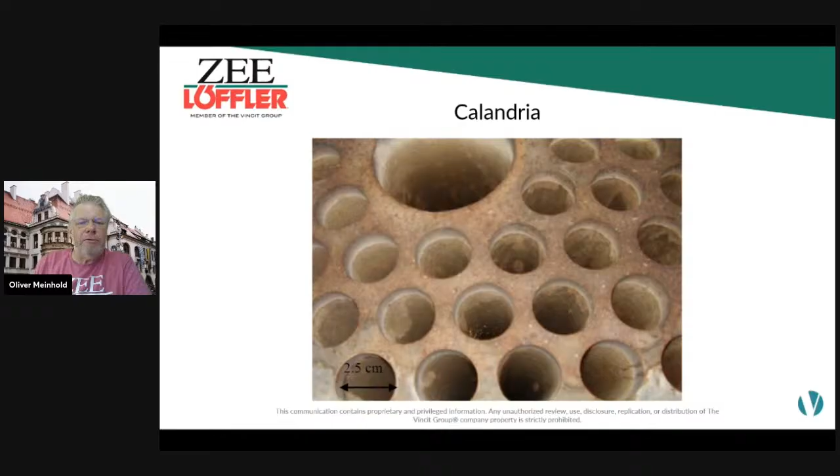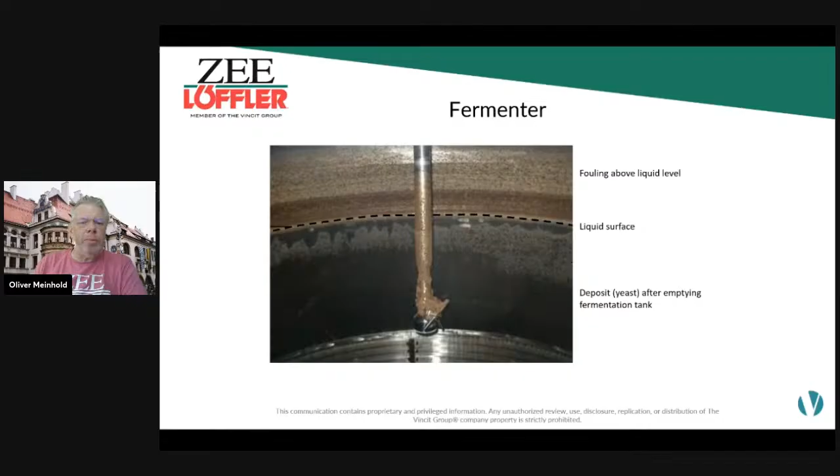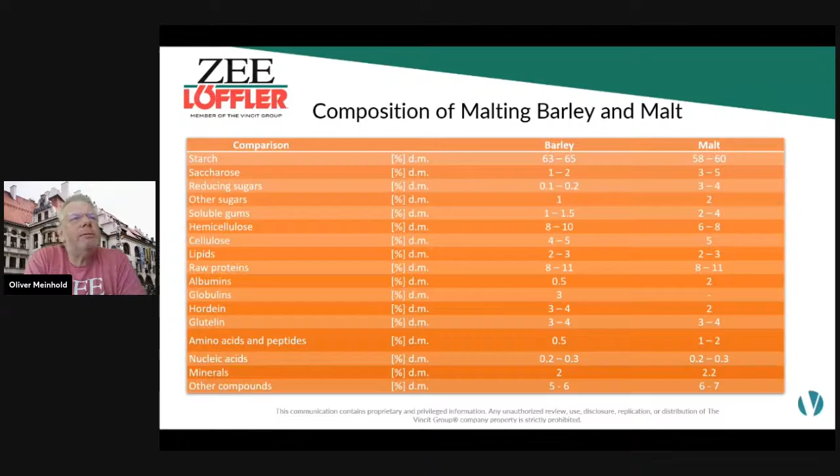When we talk about the whole process and what kind of material is going to be in your systems, what needs to be cleaned, I put up two examples. One is basically the malting barley and malt - what kind of compounds are we actually discussing? If you look at this table, you can see there's two major compounds: one is over 60%, around 60%, it's starch, so we're talking about an organic substance. Then if you look at proteins, that's around 8 to 11%. Everything else is fairly low, but that tells you that primarily during the hot side, in the kettle, in the mash tun, you will have fouling from the starch and the proteins. And if you really burn it heavily, scorching.

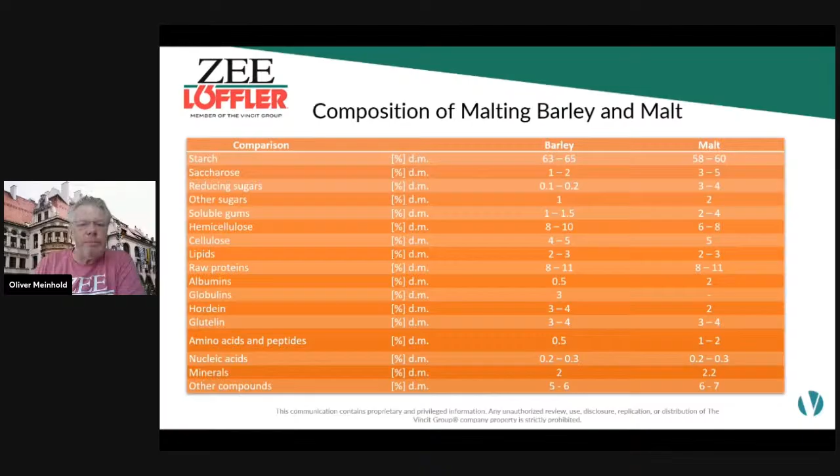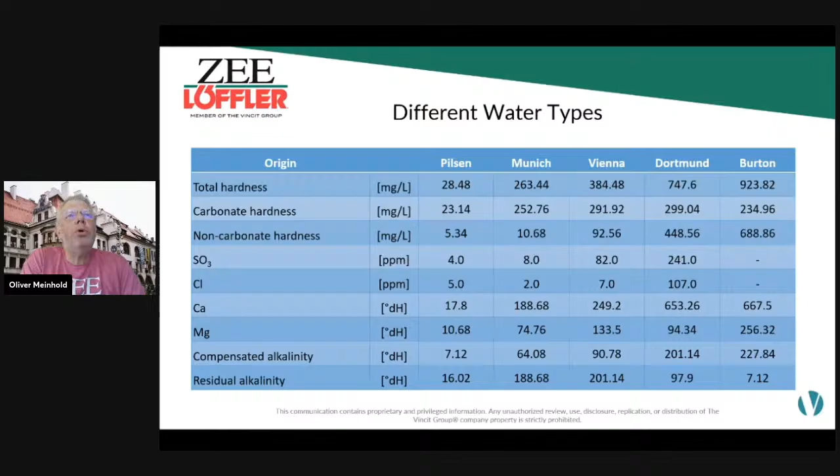Another compound is the water. These are typical waters out of the brewing industry, but in general, it's just to explain that depending on the amount of hardness of your water, you also have a higher likelihood of building up scale in your equipment. If you look at some of these waters, like far right, Burton or Dortmund, these are famous for very, very hard waters. So you have a lot of calcium and magnesium in these waters, and they tend to precipitate out and build up scale on the surface of your equipment.

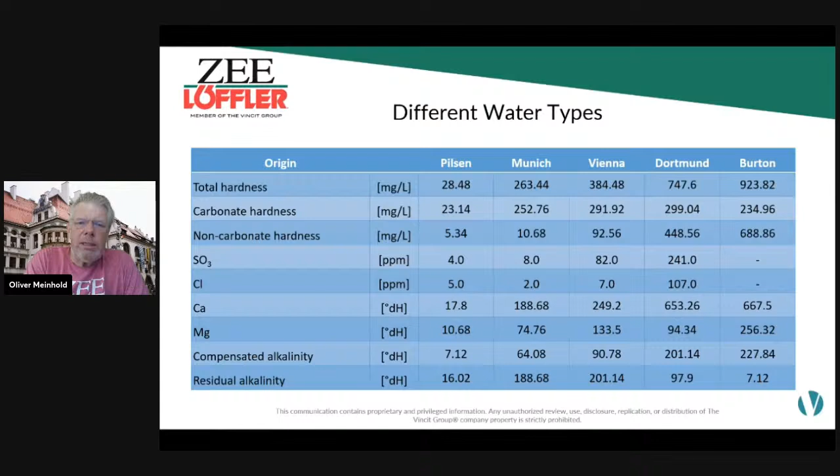So then you look at the other compounds you will put into your process later on. This is the approach - what actual material we are facing determines later on my cleaning result or my cleaning procedures.

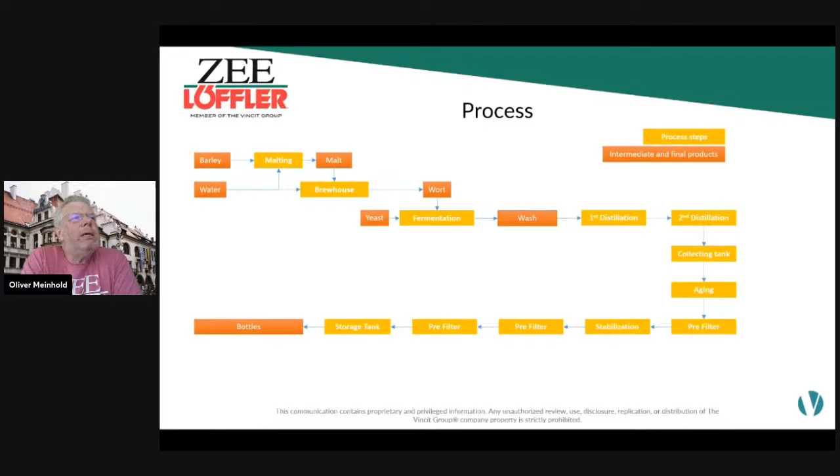Just looking at the process, we have in the far left corner, we start with malting. Then we have the brew house where we prepare the sugary solution, in quotation marks, which will then be fermented. This is kind of similar to the brewing industry in the distilling industry. Of course, in the distilling industry, we are focusing more on especially high yield on alcohol, the more the better, quotation marks. So once the fermentation is done, we have the wash, and then we basically go - this is just an example, it's not the same for everybody. Everybody has a little bit of a different setup, similar to breweries. You have one or two distillations, then it's collected, then some will be put in different types of oak barrels for aging. Then we filter them.

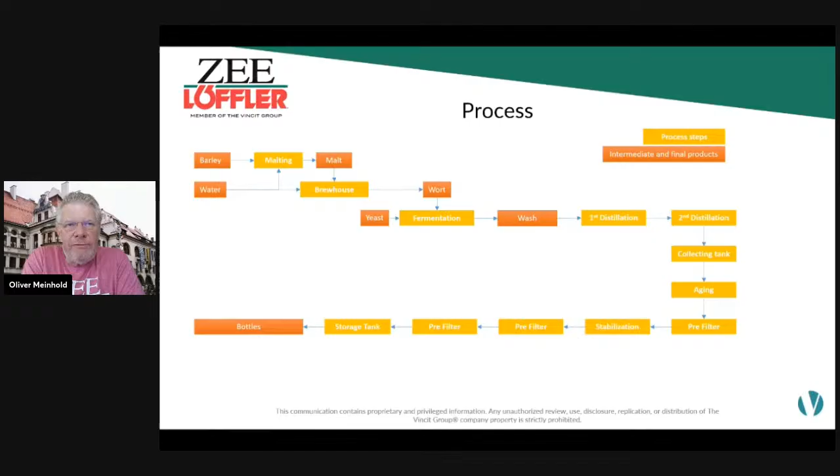Some of the stuff gets stabilized depending on what kind of material is used for this. Another few filter steps until it actually ends up in a storage tank and then finally being packaged in a bottle. So we have all kinds of different equipment in between, from starting at the malt down to the finished product in a bottle. And all these different parts or process steps need to be cleaned. Like I said before, just picture what are you putting in, what do you have in there, and what needs to be removed and how it needs to be removed.

So let's look at the terminology. CIP stands for cleaning in place. It's basically a method where we don't have to disassemble the equipment. It can be used as is with maybe some minor changes. It's often used for internal cleaning.

So you have all your pipes, your heat exchanger, your different vessels, your fermenters, and so on, your storage tanks. All these will be cleaned by an automatic system. No major modifications required. A pump will basically take the cleaning solution out of a storage tank, circulates it through these equipment, through a spray ball, through rotary jets, etc., and brings it back to the storage tank, and that is basically the cleaning.

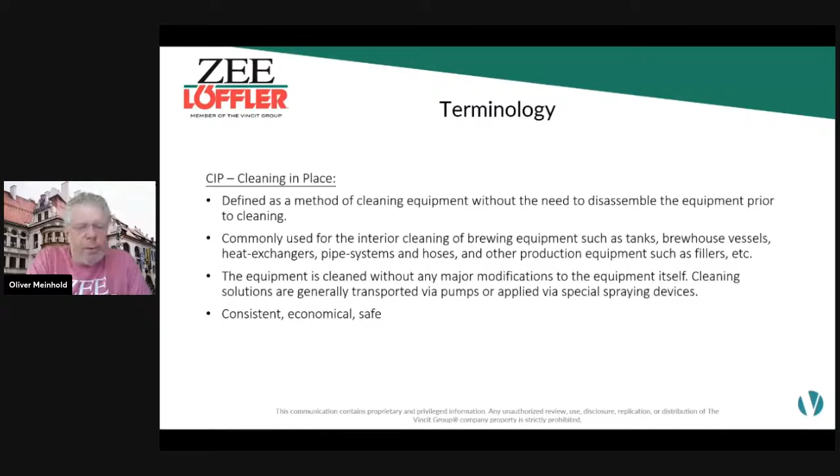The advantage of a CIP is that it is very consistent because you always have the same time, you always have the same pressure, you always have the same chemical in there, which makes it more economical. It's not like one time you use more, one time you use less water or chemistry. And due to the fact that it's completely enclosed and very automated, highly automated, it's very safe for the people working there.

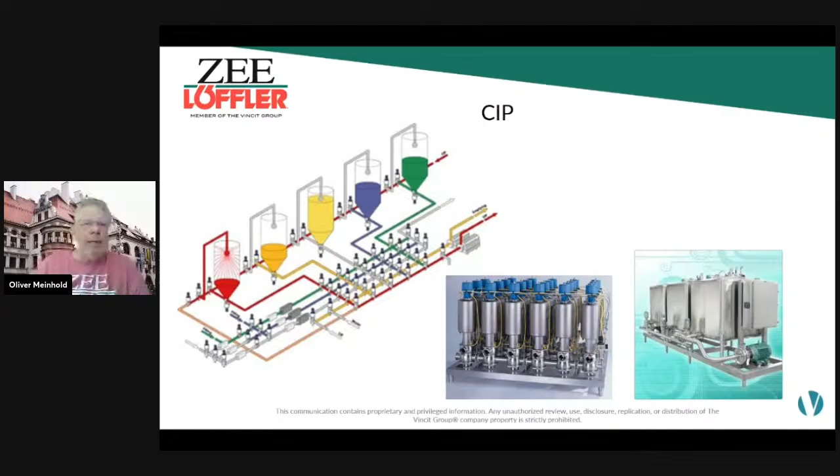And in the middle, the picture is showing you a valve block, which is basically the controlling unit for all the liquids going the right direction from the right tank to be cleaned. Some of these larger facilities, they have huge valve blocks, with hundreds of these valves because they are so highly automated and can do so many cycles at the same time.

The opposite of CIP is COP, cleaning out of place. That basically means you have to apply much more mechanical work. You have to break down the equipment. You have to take them apart. You soak them in a bucket. You take a brush, you take a sponge, whatever, to kind of wash them, to clean them.

You soak them again. Sometimes it is even recommended, if you have like a tank with a fully CIP system, that a sample valve should be taken off, taken apart, and basically soaked and manually cleaned. But this is only here and there to do it, just to ensure that it's always cleaned. It's a visual inspection, second, you will do a more intense cleaning. But overall, the more automation, the less COP, the better it is.

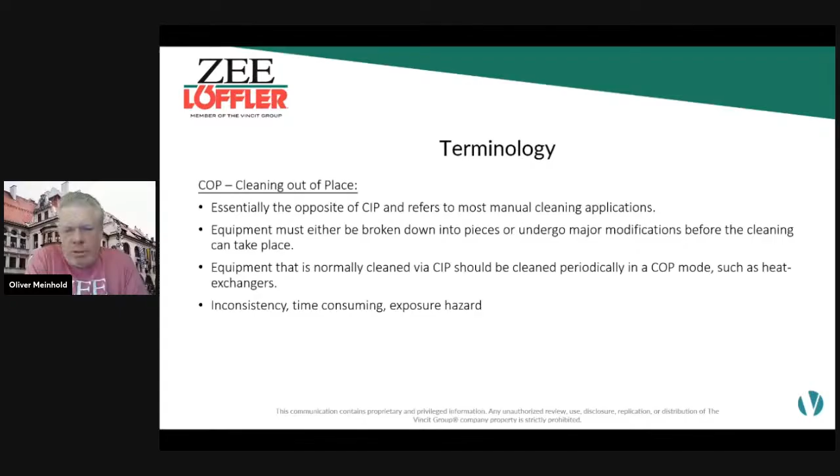Although very problematic is everybody has a different feeling of cleaning, so it's a high inconsistency. Taking things apart, soaking them, putting them back together, it's very time consuming. And of course, I always ask people to wear all the proper PPE. The exposure hazard to the chemicals is also a big issue.

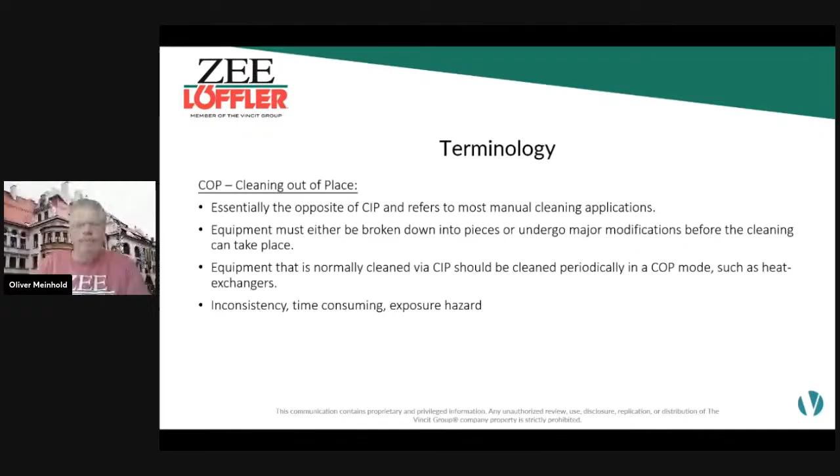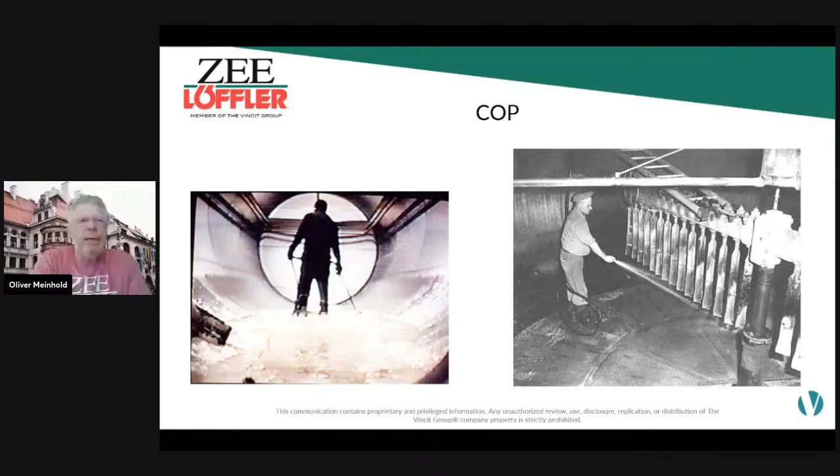So what's the theory behind the cleaning? Cleaning sounds simple. Everybody cleans at home, if it's the laundry, if it's the dishes, and so on, if you just sweep the floor. But so we have basically 4 steps.

First, what we do, we bring the cleaning solution to the point of use. So let's say in your fermenter, the picture I showed you at the beginning, you bring your caustic to that point, and first what you do is basically you wetten the whole surface and the whole soil of your krausen ring or whatever the soil is. Then with the chemicals inside of the solution, of course, they will start reacting.

And so we have various processes going on. Make sure if you have your caustic solution, try to use softened water. The harder the water gets, the more the hardness of the water competes with the soil, so the caustic is not really focusing on the soil, it also focuses on the hardness. Good built chemicals nowadays have good chelating agents in there, which takes care of this.

Then, through convective and diffusive transport, the cleaning agents get deeper into the soil to ensure everything gets properly attacked. Once that is done, you will see chemical and physical action. Physically is either from the heat of a hot caustic, or if you have a spraying device with a lot of impingement, you get more activity inside the soil. Then you start loosening it up, breaking down various bondages inside the soil to make small particles, which can then be removed.

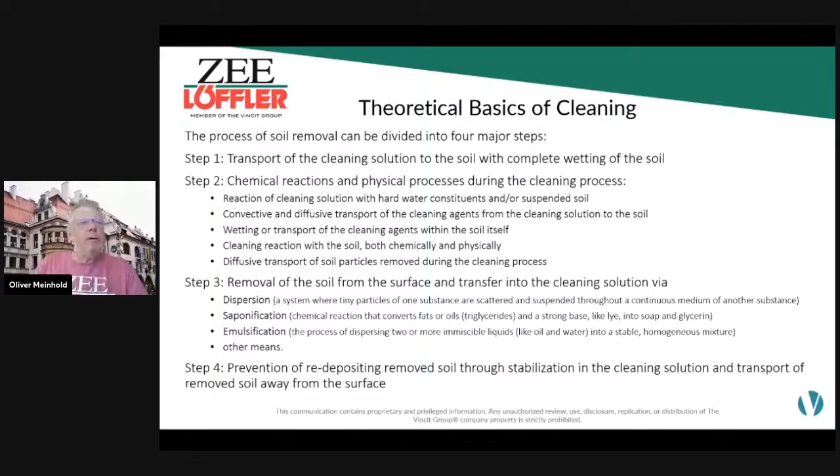But this is the theory about how to remove soil from the surface. We have basically 4 operational parameters: the chemistry, the mechanical energy from the pump with water going through a spray ball and so on, then of course temperature, and at the end, the time.

And then you add those up. The sum of all these 4 parameters creates the cleaning result, and the more automated the system is - where you keep the chemistry always at the same concentration, the same pressure on your pump, the same time, and so on - the more constant your cleaning result will be. Depending on your system, you can always make sure the cleaning result gets optimized.

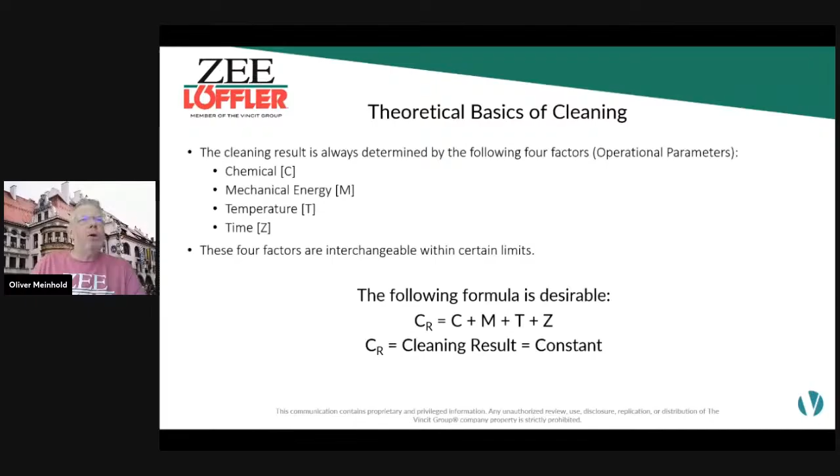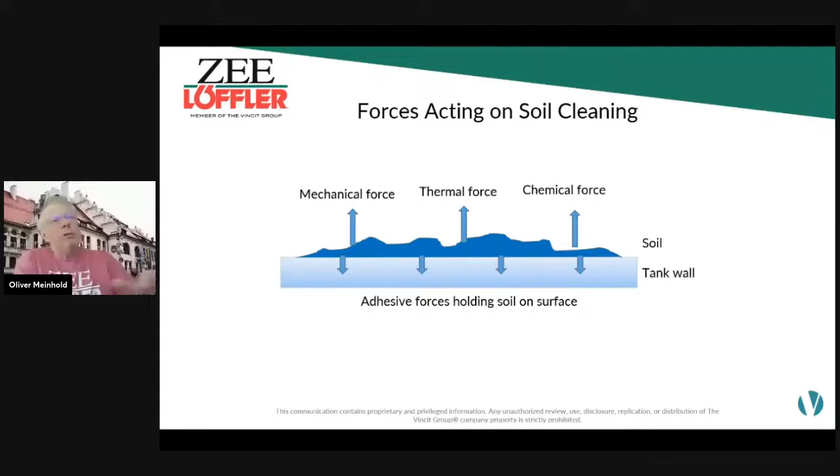Just to picture this a little bit: we have here the adhesive forces. You see the bottom, lighter colored blue, is the tank wall. Then you have the soil sitting on the tank wall, attached with various adhesive forces. It's logical that when you bring in your cleaning system, your forces have to be larger than the adhesive forces. So you bring in mechanical force, thermal force, and chemical force, and the sum of these 3 forces are stronger than the adhesive forces - that's basically how your system removes the soil from the tank wall.

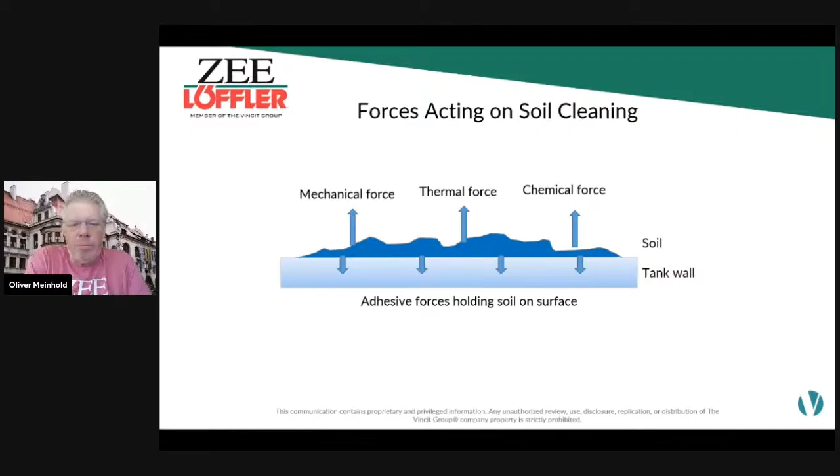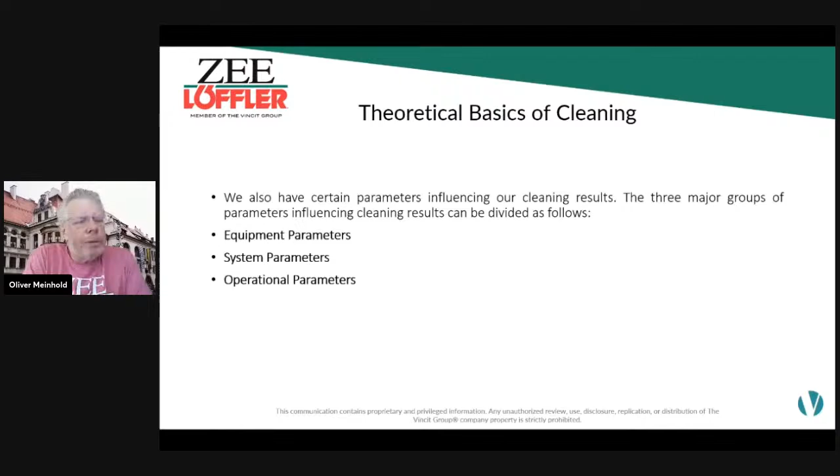We have a number of parameters which influence your cleaning: the equipment parameters, the system parameters, and the operational parameters. These 3 are the major parts which you need to observe from the beginning when you start building something.

Let's talk about equipment parameters. This is something to consider when you start building something or bringing in new equipment, or moving from an old to a larger facility, making sure all the equipment is designed for easy cleaning. Hygienic design is a keyword - you don't have rough surfaces where dirt gets attached or adhesive forces get bigger, and the materials are chemical resistant or compatible. So when planning your new production facility, make sure sanitation and cleaning are part of it from the start, to ensure you don't run into issues later.

And the more you can add as automation, the easier it is at the end, and you will save a lot of time and money.

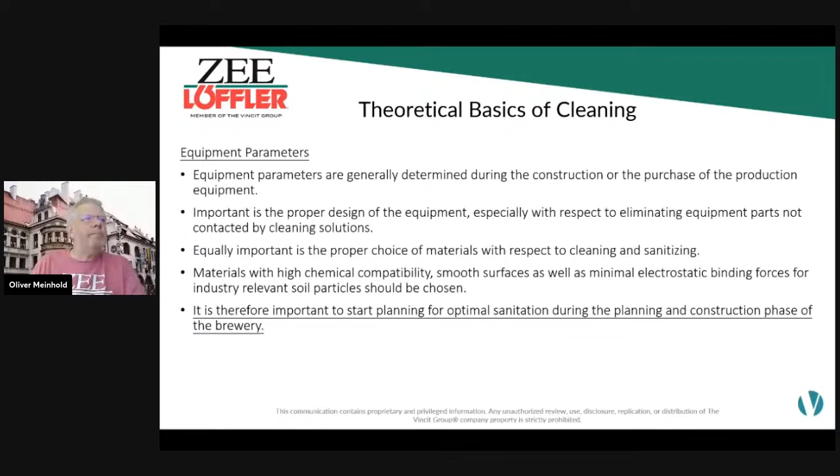System parameters are determined once everything is built up and you start actually working during regular operation.

For example, the chemical composition, the quantity you need, what's in it, how it's built. Then, of course, the frequency of sanitation, depending on what you're producing. Is it something not so heavy, loaded with organic substances? Maybe you can run 3-4 cycles before you clean. If it's something with higher load, maybe you have to clean it every time. So depending on your situation and the amount of material you put in, the frequency needs to be determined.

Then also the soil load of the cleaning solution itself. Like I said before, if you have a strainer before your CIP collection tank, you should have the capability to reduce the soil load in your caustic, and you can use it more often, which saves you a lot of water and chemistry.

I talked before that the quality of the process water itself, especially the hardness, is a big issue.

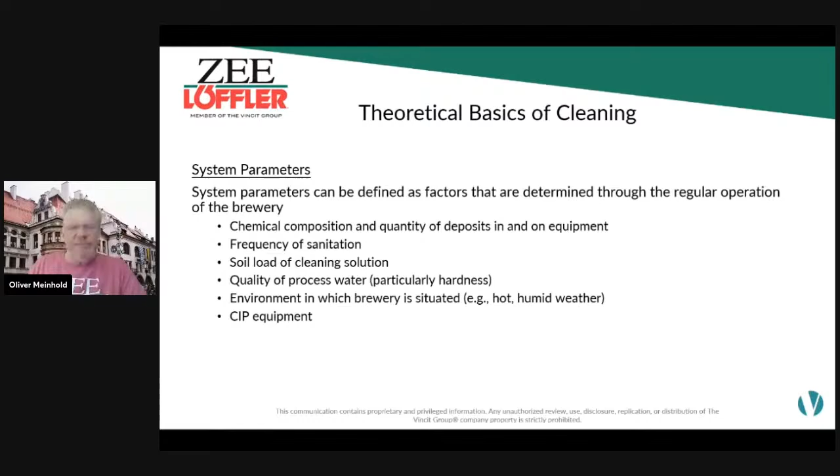Then Mr. Sinner, he was a guy working for Henkel Ecolab. He basically said, okay, we have 4 parameters in cleaning: concentration, temperature, mechanics, and time.

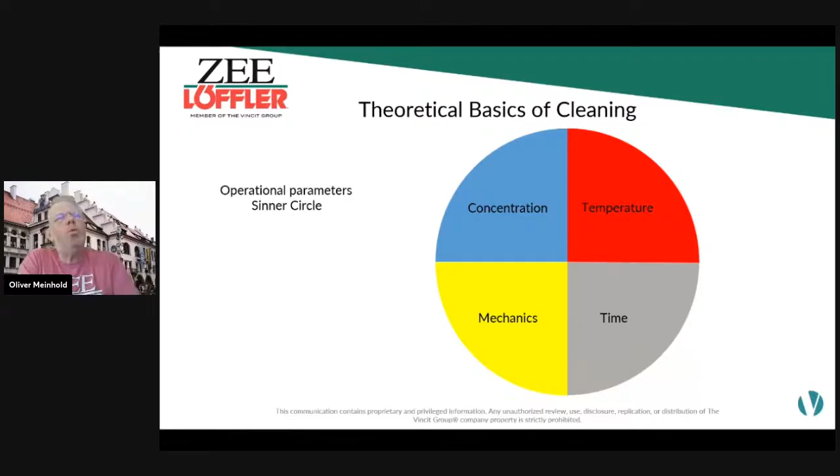When you work with those, you can manipulate them. The mechanics are pretty much set, you can't change much there. But you can say, okay, I have a time constraint, so I cannot let it run for 3 hours, so maybe I have to increase the temperature or the concentration. The pie shape gets bigger for the red temperature or the blue concentration, but I can shorten my time. Or if you say I don't have any energy to heat it up, the temperature gets smaller, so I have to let it run longer, or I have to increase the concentration of the chemical to compensate for the lack of temperature. With these parameters, you can actually optimize your cleaning to your specific needs.

Mostly if I get asked, what would you recommend? I say, so what is your most pressing parameter? Is it time? Is it that you want to be environmentally friendly, so not much energy? According to these parameters, you can adjust your program.

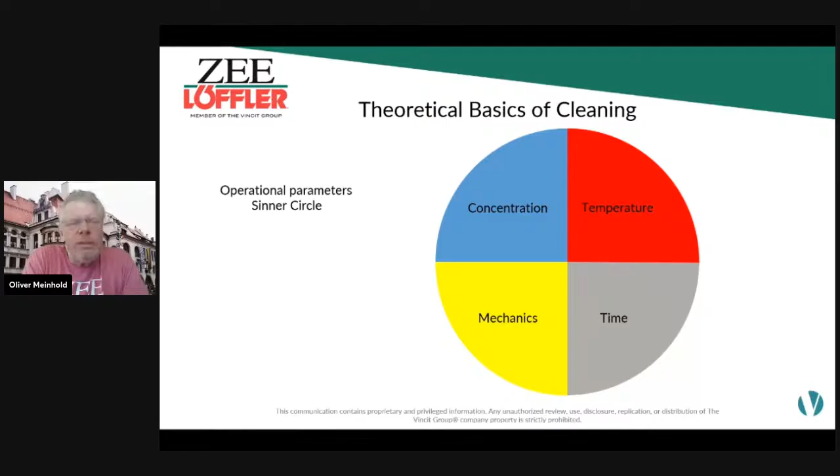Temperature. Most chemicals work at ambient temperature. The only one where we really heat it up is caustic. Caustic has very interesting behavior at 135, 140 degrees Fahrenheit, where the efficacy significantly jumps up.

There's a rule out there: if you increase the temperature by 10 C, which is about 18 Fahrenheit, your chemical reaction doubles. So theoretically, you should be able to cut your time in half. Reality is a little different, but from the pure chemical reaction, if you increase the temperature, they go faster, so you can shorten the system.

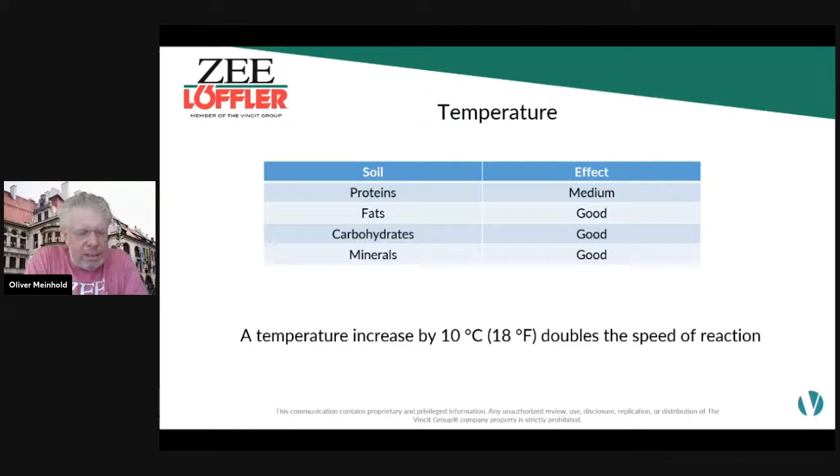So we always recommend caustic to be at the higher temperature, maximum around 175. But before you crank it up, make sure the equipment you're cleaning is also safe for these temperatures. Always look up in your manufacturer's manual what is the highest temperature, the highest concentration, what type of chemicals, to ensure you don't destroy your equipment.

Time is another parameter. It depends on the process type, on the equipment side, the process itself, and how long each step is running. Most important is the temperature of the cleaning solution: the hotter, the shorter the time. And the higher the concentration of the chemical, the shorter the time.

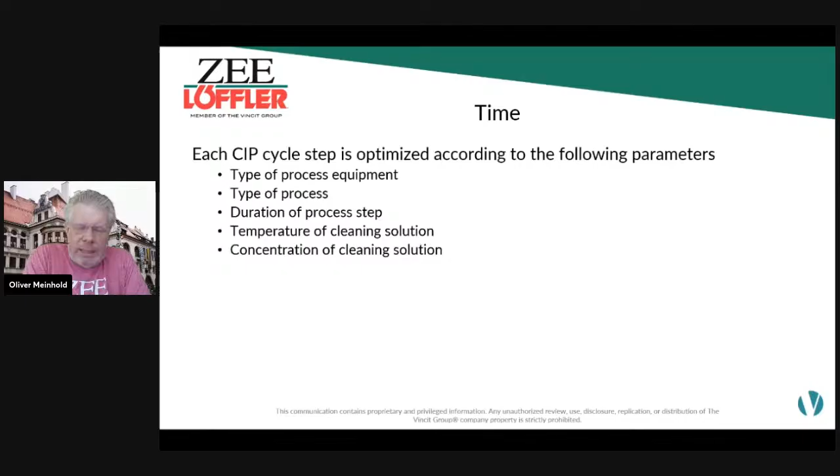So if you don't want to waste too much chemistry, just crank down the concentration and let it run longer. Most of you may have noticed that for the last 30, 40 years, your washer or dishwasher went from virtually 15, 20-minute cycles to nowadays up to 2+ hours. But they reduce the amount of water and energy because they now take time as one of the major parameters for the cleaning.

Mechanics, that's actually the most important topic, and I will talk most about this, because often if there's an issue with the cleaning, it's mostly related to a mechanical issue.

If you take a classical fermenter, you have your cylindrical part, at the bottom you have your cone, and at the top you have a dome. The idea is that when you have a spray ball inside, it brings the solution to the tank wall, and you want a closed curtain of liquid of about 2 millimeter thickness.

So you have enough liquid to get your chemicals transported to the surface, but also that your curtain of liquid running down has enough mechanical energy to remove loosened particles and bring them back to the CIP tank. So it's very important that your spraying device is in perfect condition. Otherwise, it won't work.

You open up your tank after cleaning and you see one side is completely dirty. Maybe you have some blockages in your spray ball or your rotary system is not doing its job.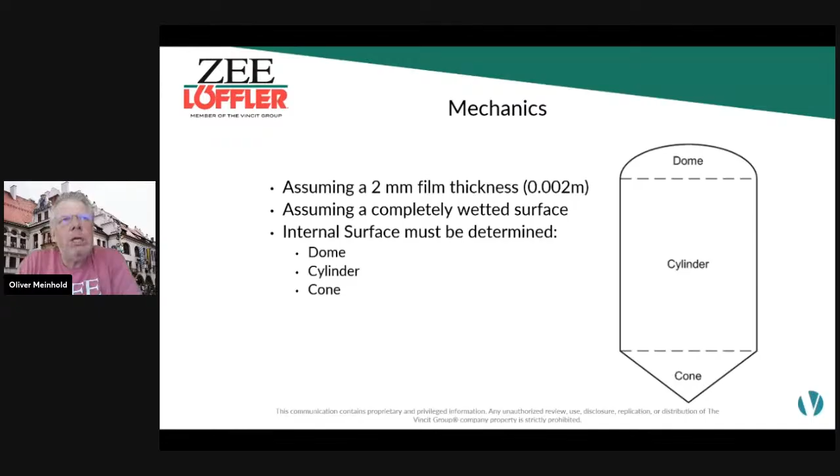So what I recommend, and this is only with cold water, no chemistry, is if you have a manhole in a smaller tank, just circulate that water and watch with a strong flashlight to see if you really have a closed curtain coming down on all sides. Sometimes some of my colleagues even used a GoPro with a stick on it, filming inside just to ensure the complete wall is covered in a nice liquid curtain.

Spray balls come in all kinds of shapes and sizes. Smaller tanks mostly have a static spray ball. The majority use something like a 360, on the far left, because it's a much easier way to get everything cleaned. Quite often when you look at these tanks as they get filled, the foam comes up, the CO2 rises more and more, so everything in the tank will be completely covered in soil.

But then you have other types, a 180 down, a 180 up, depending on your tank. If you have an open tank, maybe a 180 down is sufficient. But that's basically how you have your system set up.

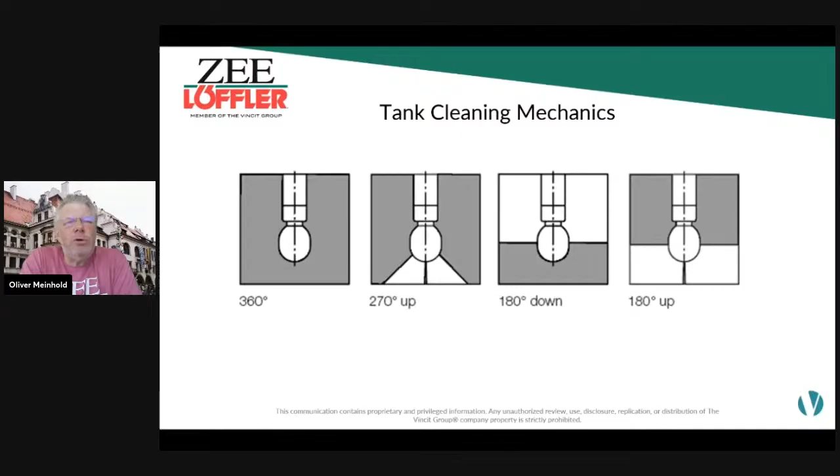Very important, especially for pipes, is the flow through your pipe. Here we talk about two terminologies: laminar flow and turbulent flow. The laminar flow is basically very straight, direct layers of speeds of the liquid, but towards the wall the speed gets slower and slower, and the first layer of liquid on the wall has actually a speed of 0. That means there is no mechanical activity, and the cleaning result is not going in the right direction.

So what you need to do is ensure you have a turbulent flow, meaning a certain minimum speed going through your pipe, because then you have internal vortexes which create enough mechanical energy to clean your wall. For doing this, Mr. Reynolds came up with a number, the Reynolds number, and determined that when you exceed a certain number, you can be sure you have a turbulent flow versus a laminar flow.

So if you look at the big arrow at the bottom, up to about 2100, we have a laminar flow. Then between 2100 to 4000, we have a transition phase, so it can be laminar or turbulent. But if you get beyond 4000, you are sure that's a turbulent flow. So how do you determine this?

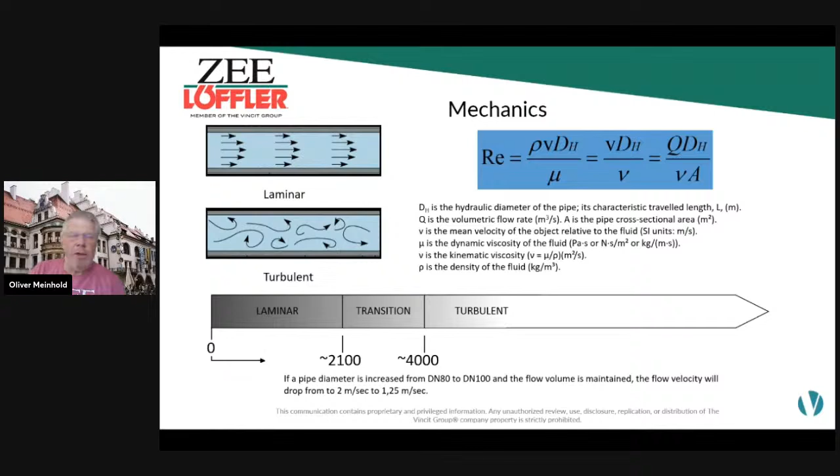If you really want to find out what's going on, you can rent flow meters which you attach to the pipe from the outside, so you don't have to build anything in. The system can tell you exactly how fast your liquid is, what the flow rate is, and so on. Just to give you an idea, if you have a pipe diameter of about 80 millimeters, the DN80, which is a little more than 3 inches, and you go up to 4 inches, about 100 millimeters, your speed drops from 2 meters per second to 1.25 meters per second. So that is already a questionable area. If you have pipe diameter changes, make sure that even in the thickest pipe, you always have the proper speed to ensure a turbulent flow.

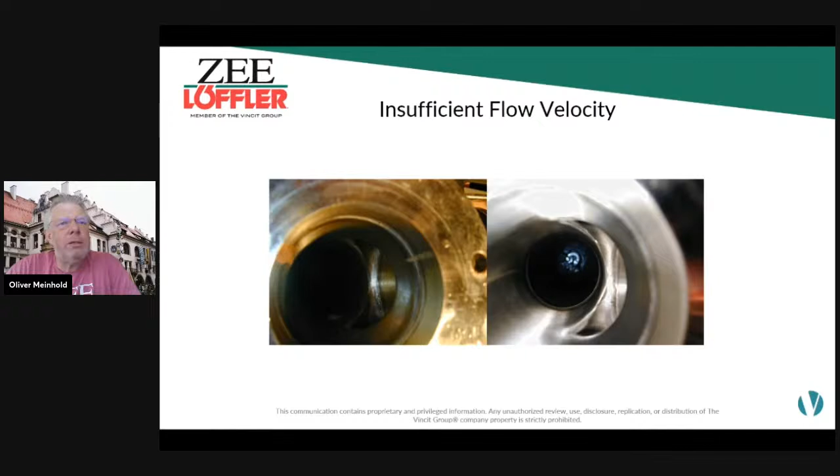Here's an example - that's exactly the same pipe, cleaned and done on purpose just for demonstration. We ran it very slowly through, so we definitely had a laminar flow. You can see now that the pipe didn't get cleaned, because at the wall there was zero mechanical activity. Then we repeated it and sped up the liquid, so we had a turbulent flow, and you can see it's spotless, nice and clean.

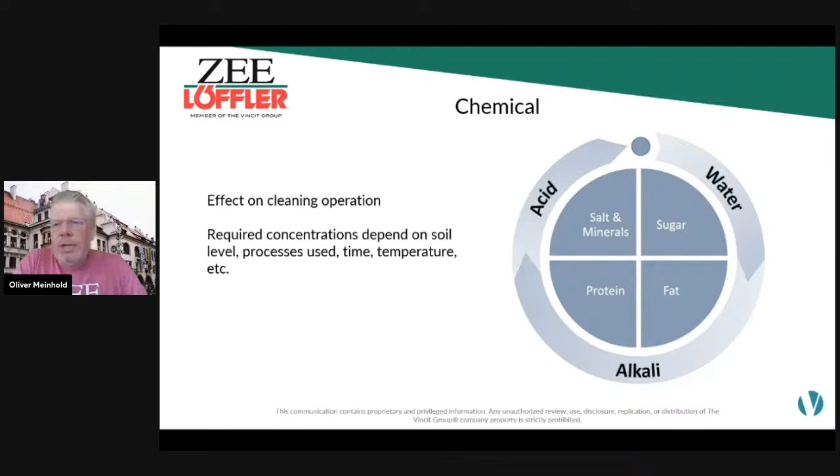The chemical itself - and we talked about this before - we deal either with organic substances or inorganic substances, and depending on what it is, you have different types of chemicals to clean. Sugar is basically water soluble, though if it gets scorched on, it's not that easy to dissolve by water anymore. But when you go over to fat and protein, which are considered organic substances, that's when your caustic comes into play. And if you continue on to inorganic substances like salt and minerals, that's where acid needs to be used. Everybody knows from home, your coffee maker or water boiler in your kitchen, when they start showing scale, you add vinegar or another organic acid, citric acid, to ensure the scale is removed.

I mentioned before, the quality of the water is very important - the chemical properties, so you want the right pH, the right hardness, but also biological. You don't want a ton of contamination or microorganisms in there, because they will be carried inside, and once you have them in the system, it's not easy to get them 100% out.

The pre-rinsing is basically to ensure that everything which is already loose, which doesn't require any chemical reaction to loosen up, is removed, so you reduce your soil load in your caustic. This should be done with a few burst rinses going straight to the drain.

Then the chemical cleaning is basically the most critical part. You have to make sure that everything works. A quick, easy test: once you open up a tank and you still see spots, what happened?

If you can wipe them off easily with a little piece of cloth, that means we were able to bring the chemicals there. They kind of broke it down, so it's loose, but we did not have enough mechanical action to remove it. If it's not moving at all, it's really hard stuck on, and you really have to scrape it off. That basically tells you we didn't even get the chemistry there. So that is mostly a mechanical issue, and we have to look into why we didn't get enough liquid there, and so on.

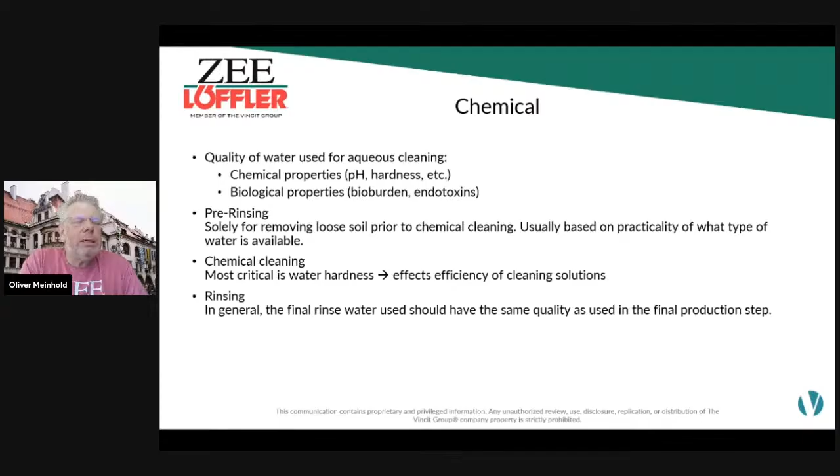Last but not least, the final rinsing is important to remove the caustic or the acid, whatever has been in there, to ensure that when you switch from caustic over to acid, you don't have too much remaining or residual caustic neutralizing the acid, removing the efficacy of the acid. So it's always recommendable to rinse between the chemicals.

A typical program, the first is a pre-rinse with ambient temperature. It's a few minutes. Sometimes we just do a few burst rinses, 3, 4, 5 times. If you have a chance to watch the drainage, when the water that's very dirty cleans up, that basically would be an indication that none of the loose dirt is there anymore.

Then we do the main work. Mostly it's organic substances, so we have caustic, about a 2% solution. That's the only one where we go higher in temperatures. The circulation time varies depending on the soil load and other factors. If you want, you can add a booster, a hydrogen peroxide-based booster, to ensure the efficacy of the caustic is increased. Built caustics have surfactants in there to reduce the viscosity and surface tension, so it gets deeper into cracks and crevices.

Once that's done, you use water to push the caustic back to your collection tank. If you have an automated system, a conductivity probe guides this - when the caustic is still high, the Siemens value is still high from the conductivity, it will divert it directly into the tank. Once that drops, you would start diluting your caustic, and you just go straight to your drain.

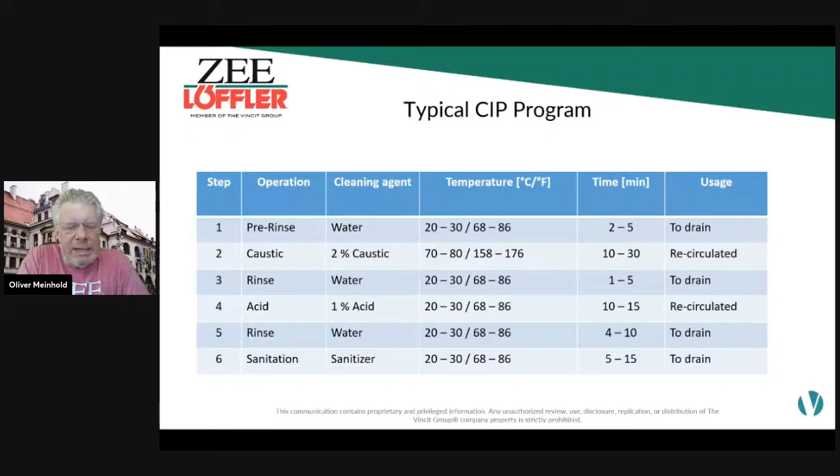Very important, before you sanitize, always make sure that your surface is absolutely clean, because you cannot sanitize a dirty surface. To have a fully successful sanitation, you have to ensure that everything else is removed. So if you have any remaining soil in there, that's a perfect place for harboring microorganisms where the sanitizer doesn't get there.

So you say, oh, I ran everything, looks good, sanitizer did its 15-minute work on everything. Even PAA works much faster, but we always recommend 10 to 15 minutes to ensure that every spot of your equipment gets actually the 30-40 seconds of PAA activity.

Also, the more you have in there, especially like peracetic acid, when it deals with other material, it starts breaking down, so it also loses efficacy very fast. So the cleaner your tank, or if the tank is perfectly clean, then it works easily.

You don't really sterilize, you just sanitize in quotation marks. So you have a log 5 reduction of your microorganisms, which is perfect in most cases. But keep in mind, if you let the tank sit for multiple days or weeks without using it, there were enough microorganisms surviving that when they start regrowing, you need to sanitize again right before the next time you use it, to ensure that all is really killed.

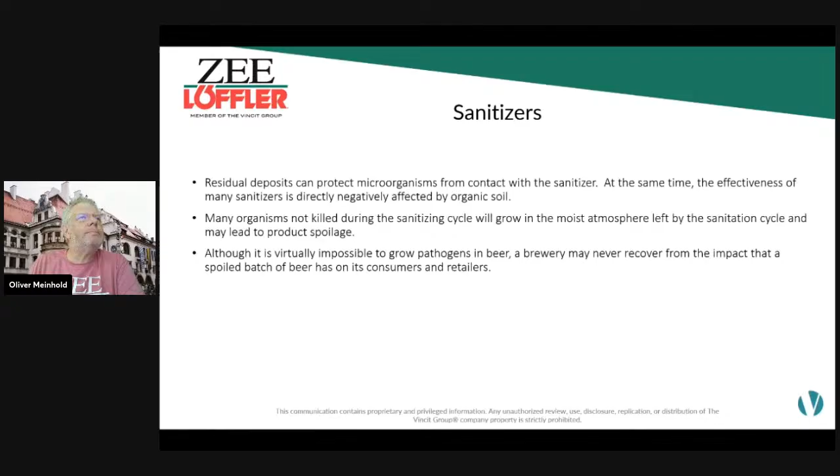Next to chemical sanitation, we can also do thermal sanitation, which is used in a few ways. It's not advisable to heat sanitize a big fermenter, because that's a lot of energy and steam which you need. Also, in such a large tank, the difference between hot and cold can be very extreme, so especially where you have cooling jackets, your metal is getting thermal stress, and that's not advisable. Besides, the amount of steam you need is pretty expensive.

Small items like a keg cleaner, where you have a very small closed environment, steam is very efficient. The beauty about steam, or heat, is if you take hot water it penetrates or heats up the whole pipe, the whole valve and everything. This way, even if you have microorganisms sitting deeper in a gasket, in a crack or crevice, where the sanitizer will not get there, the heat will get there. So heat has its advantages, but nowadays, in the majority, PA or any other chemical sanitation is the way to go.

How to optimize it: cost of clean. Some of these products are not cheap, but mostly they're very highly engineered, so you basically use much less of it. So the cost of clean is actually the number you're looking for at the end. If the product is more efficient, it's shorter, it needs less energy for heating up and so on.

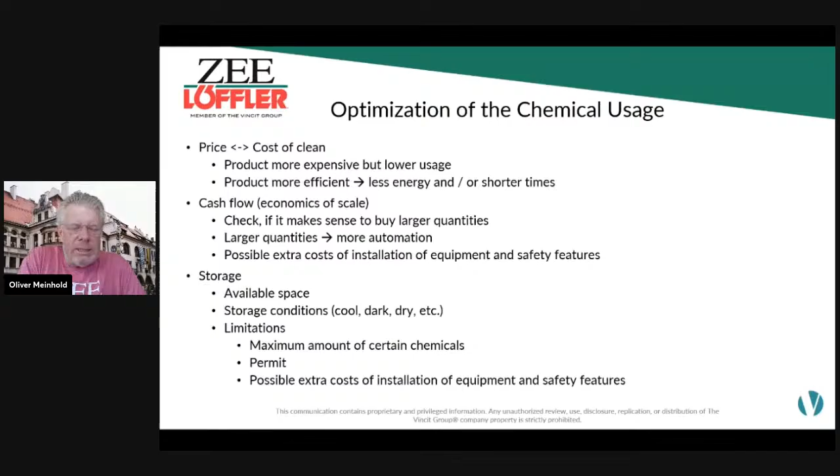So when you want to really do your comparison, make sure that the cost of clean, what does it cost me to clean a tank, how much time do I put in, how much liquid do I have to put in, what's the temperature, energy and so on. Then you have a better way of comparing, this product costs me X amount versus this one. That's a big difference.

Do we have enough caustic? Do we have enough acid in our system, and so on? Of course, it will cost more upfront, but calculate the ROI on this, and then you should be in a good picture. Storage is another problem, depending on if you have a small brewery, like in a big city where storage or space in general is not available.

How much space do you have available? Second, what are the conditions? Chemicals should always be stored in a cool, ideally dark and dry environment, well ventilated, of course, because especially PA or the oxidizer, the hydrogen peroxide based ones, when they get too warm they start breaking down. So you start basically destroying your actual cleaning solution.

Sometimes you have limitations, depending on where you're based. You cannot have more than a certain amount of certain chemicals on site. What's your permit? What can you do, especially if you look at certain chemicals, special sanitizers in regards to your wastewater? And then, of course, there's extra cost for installation of equipment.

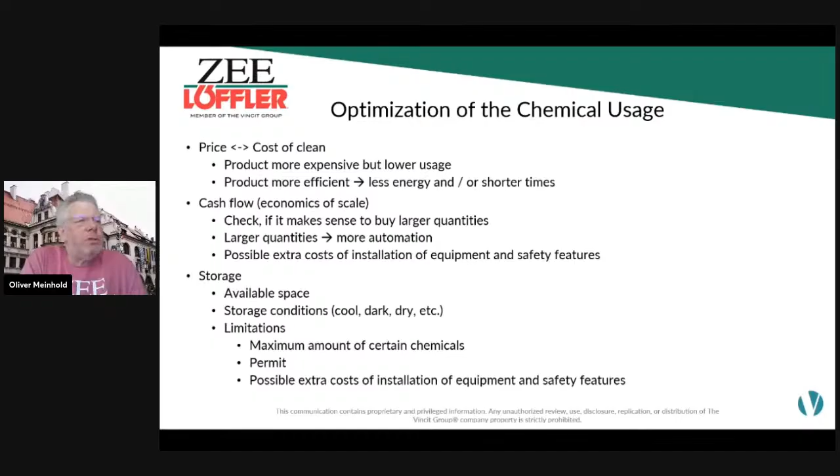Transportation is also nowadays a very big topic. Trucking went through the roof. Larger quantities mean lower transportation costs. Often the truck needs to roll up. Maybe you can share deliveries with your neighboring brewery and so on. If you have a mini bulk, basically a tank which gets filled but it's not a full tanker load, a smaller one, maybe you can have a milk run, things like that.

But with chemicals, the higher the concentration, the lower the cost per unit. Blended engineered chemicals have a lower usage rate. But the important thing is stability: how stable is it, especially with PA, hydrogen peroxide, or chlorinated products, which don't have a very long shelf life. The shelf life also depends on your storage conditions. The warmer it is, the more sunlight gets in there, the more likely the shelf life gets reduced.

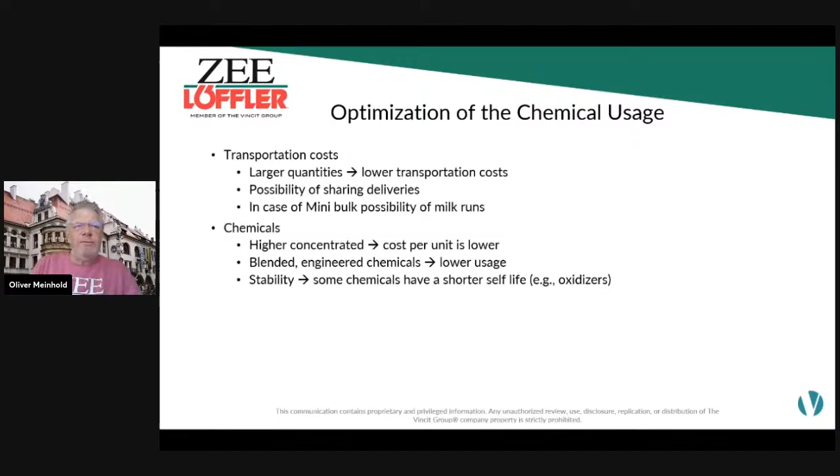I talked about this, here's just a little summary. When you look at the process parameter time, the longer it is, the less chemicals you need, or the lower the temperatures are. If you have a higher temperature, you can speed up the process, shorten your cycles, and use less chemicals.

Mechanics - make sure you always have an eye on your pipes, the velocity. Then, of course, the spraying device, if you have a rotary jet where you really utilize the impingement, you add quite a bit of cleaning force through the mechanicals. And then you can add a booster like hydrogen peroxide to optimize your caustic usage.

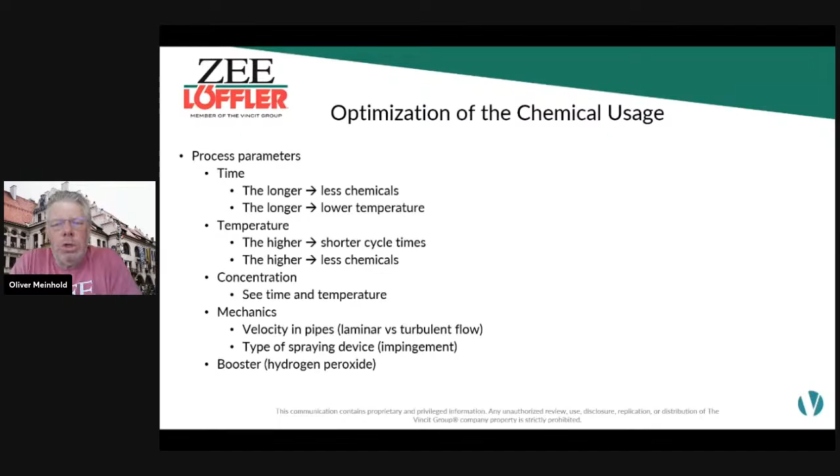Again, the Sinner cycle, this colored cycle I showed you before - I mentioned this already. So what's your personal preference? Make sure that you look at your own system, your own schedules, and everything.

What's ideal - where's your bottleneck in your process? What's available? Do you have high energy cost or low energy cost? How's the water available? What's the price of the water? What's the quality of the water? And so on.

What's your wastewater? Do you have to treat it yourself? Can you put it down the drain without any treatment, no pH adjustment, and so on? This is something you need to determine. We are more than happy to help you on this, but it's something you have to figure out to see where your personal preference of cleaning lies.

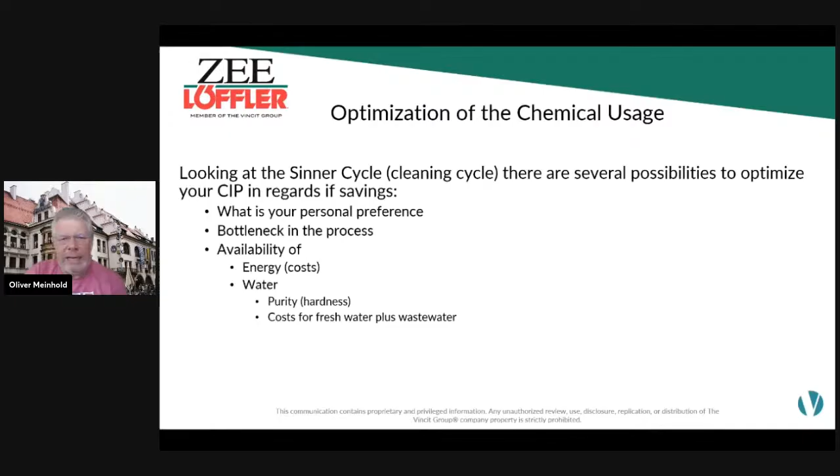CIP automation - that's another thing I'd like to put a little emphasis on. Nowadays you get these fully automated systems, nice screens with all these beautiful colored curves, control units, and so on. The problem is, are you sure it's really doing what it says it is?

Is your temperature gauge inside reading correctly? Is your conductivity probe reading the right concentration? If you start leaning back and relying on this, that is not the best idea. You still have to make sure every time that all the systems are reading correctly.

So there are certain PMs for a temperature probe, a conductivity probe, and so on, where you basically just control - is this correct? You take an external thermometer, hold it up to the pipe or the liquid, to see if it's really the 140s which the system tells you. You take a sample of the probe, measure the concentration, measure the conductivity - is it the same as the others?

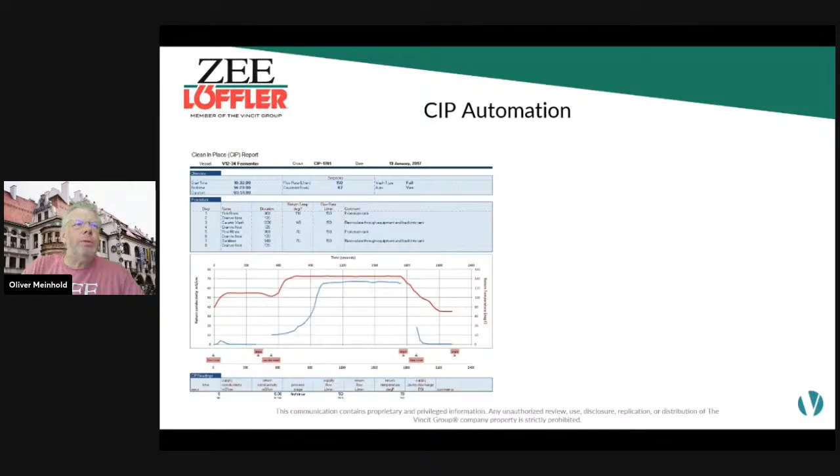So just make sure that when you have the automation, you also use these basic audits to make sure all the equipment is properly working.

So to control this, validate it, and give yourself an overview to make sure you don't have sleepless nights - I mentioned before that multiple parameters of a CIP work together. Make sure you record everything, have proper recording and documentation of all your cycles, so you can see a drift, for example when the...

CIP solution takes longer to heat up. Maybe your heat exchanger of your CIP system isn't clean enough anymore, or the conductivity probe is off. You see also a higher usage rate - maybe there's some air in the system so your conductivity probe is reading wrong numbers, in quotation marks.

There are so-called dye tests - it's a liquid with an alcohol. You spray it on everything, the alcohol evaporates, and the dye remains. Then you can run the system, especially like in fillers where you have spraying nozzles, and test if the nozzles are working properly, or if you see areas with spray shadows where cleaning stops on certain spots. Make sure this is done on a regular basis to ensure all your equipment is working properly.

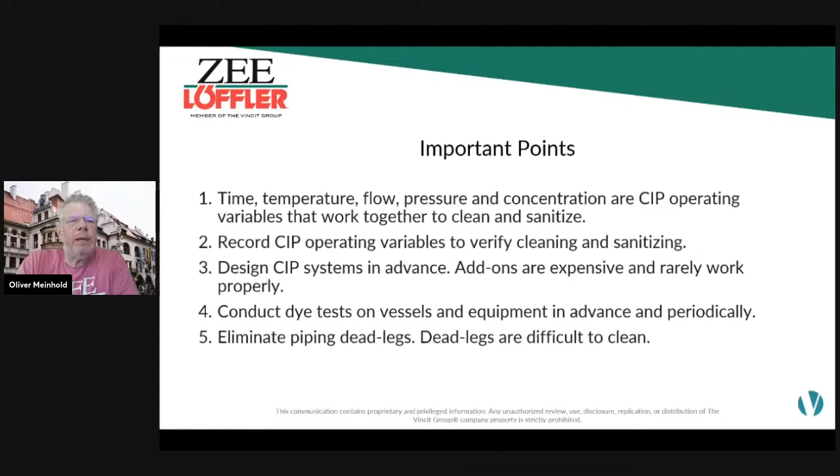Once you have it in there, it's hard to clean. So you want to make sure there's no dead leg in your system, because this is a perfect place for microorganisms and so on to harbor.

Some simple things are puddles in vessels. Sometimes the equipment, if it's not properly installed, perfectly leveled, or the bottom of the tank is not perfect, you might have puddles forming, and that's a perfect area for growth of microorganisms, biofilms, and bathtub rings. So this is something which definitely needs to be eliminated.

The pipes, again, double check with a flow meter, and control the system so that the speed through your pipes is proper to ensure that you have turbulent flow.

Also important, when you have a pipe system, of course you always look for aesthetic reasons, everything needs to be either vertical or horizontal. But for most pipes, it's always advisable to have a little slope so they're self-draining, so no liquids remain standing there for days and weeks, because that's where microorganisms can start regrowing, and then all your cleaning and sanitation effort was basically useless.

Simple things like, if you have a gasket, don't over tighten it, don't squeeze the water out of a gasket, because then you start having leakages. Replace the gaskets on a regular schedule. If you have a passivation going on, maybe you should have a different gasket set for this, because the very strong nitric acid is pretty harsh on gaskets. So make sure that this is perfect, because the losses, either it's a loss financially, or if you have dripping harsh chemicals, caustic acid on the ground, there's either danger to people, or you damage equipment.

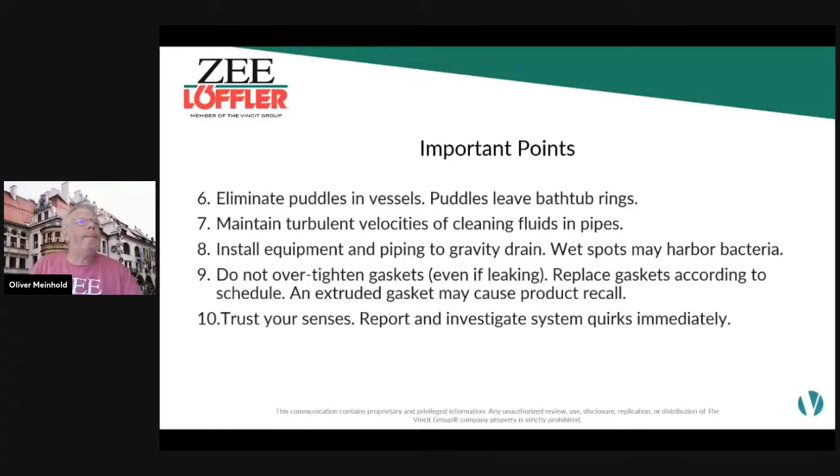There are multiple reasons for this. One is actually that if you still have a lot of CO2 in it and you start with a caustic, and you haven't really pre-evacuated the tank, the CO2 is nothing else like an acid. It will neutralize with the caustic, and basically the gas is gone, so you have zero pressure in your tank, and then you will collapse it.

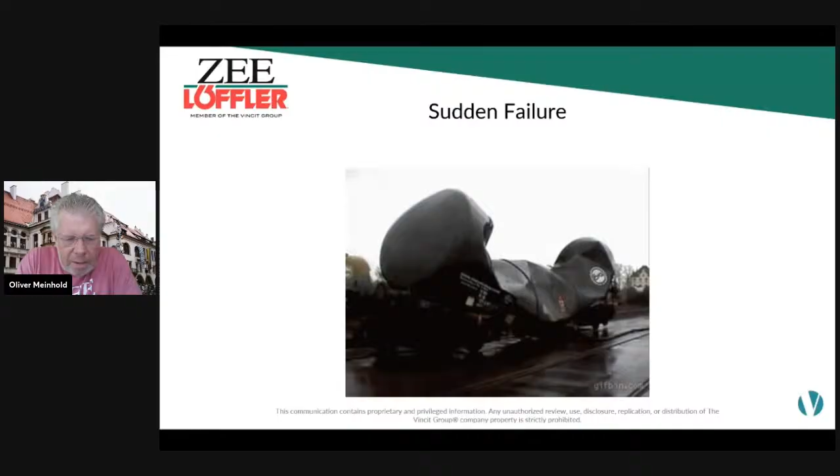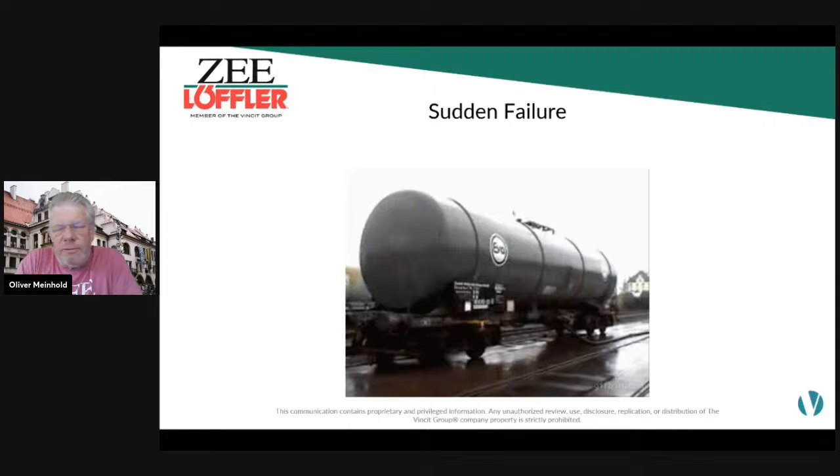Another possibility is if you run a hot caustic cycle, everything is very hot, and then you come in with very cold water and suddenly drop the temperature significantly from warm to cold. That also means you have a significant pressure drop, which can also be the reason for a collapsing tank. And even if you have a pump pulling out your product for the next process step, and you don't vent the tank properly, it can happen that you actually pull a vacuum by pulling out the liquid.